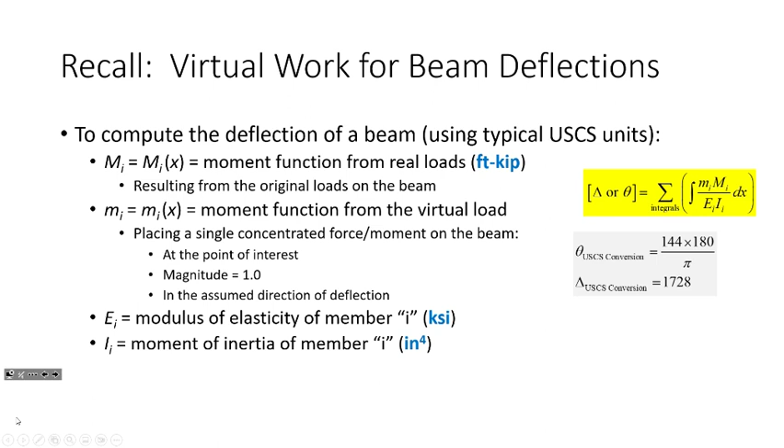Now, if you look at this from a units perspective, it doesn't align. We have foot-kips, but then we have KSI and inches to the fourth. So we have to use some conversion factors, and I derived these in the lecture video I pre-recorded. For deflections, the conversion factor is 1728, and for rotations it's 144. But since I like my rotations in degrees instead of radians, I take the 144 and multiply by 180 over pi to get the resulting value in degrees, not radians. Okay, let's see.

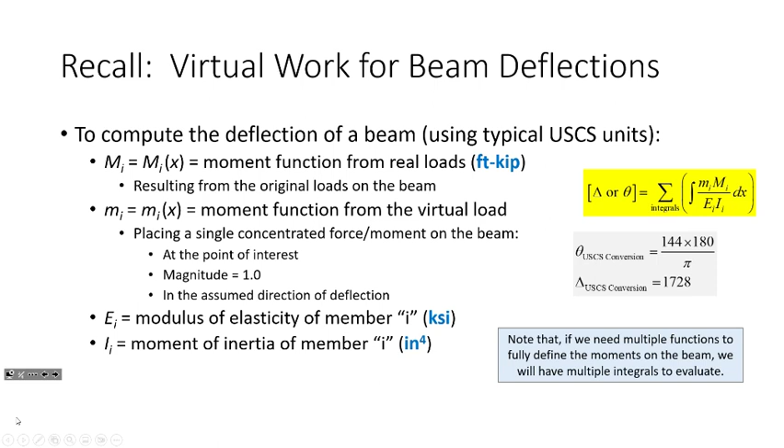We're not going to have this problem now, but we will start dealing with it Wednesday: if we need multiple functions to fully define the moments on the beam, we'll need multiple integrals to evaluate. This is a skill I'm really interested in harvesting over the next few lectures, so I want to talk about the need for multiple moment functions.

In short, you need multiple functions whenever you have a load interruption on the beam—like a reaction, a distributed load that commences or terminates, or a concentrated force effect that shows up. An easy way to figure this out is to move your section cut along the beam. Once you pass through a new type of load or load interruption, you need a new moment function.

For example, if I look at this beam, it has a reaction here and a reaction here, with a triangular distributed load. If I ask how many moment functions you'd need to fully define the moment diagram, an easy way is to take a vertical line and start moving it along the beam.

If I cut a section here and look this way, I see a triangular load. If I move it here, still a triangular load—from here all the way to here, it stays the same. But once I pass that point, it's different: now I've got the triangular load, plus this reaction and this distributed load. I keep going—distributed load, reaction, triangular load. It's not until I get to right here that it changes again: now there are two reactions. So this beam would need three mathematical functions to fully define the moment diagram.

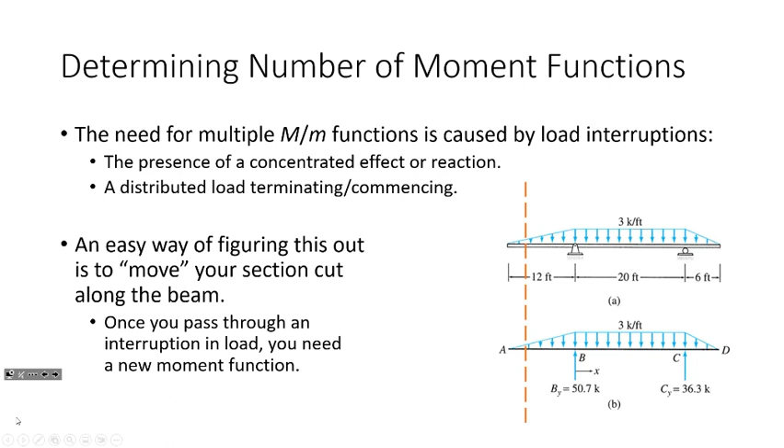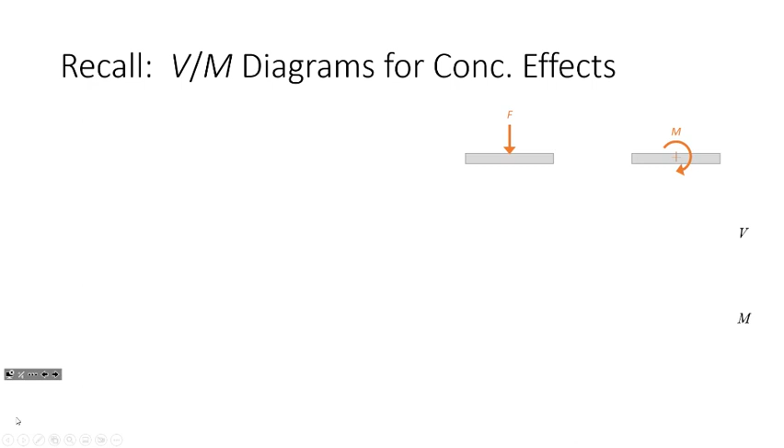Now, before we get into this, I want to recall what happens to the shear and moment diagrams for concentrated force effects. Why is this important? Because with virtual structures, you remove the entirety of the loads and replace them with either a concentrated force or a concentrated moment, at the point where you're interested in finding deflections in the assumed direction. So what does that look like? Let's take a look at the concentrated force effect.

You get these stair-stepped shear diagrams, and for moment diagrams, piecewise linear functions—that's what it looks like for concentrated forces. What about concentrated moments? It doesn't change the shear diagram, but the moment diagram gets a jump. So let's look at these moment diagrams—do you see any patterns? Every section of the moment diagram is a line—they're linear, right?

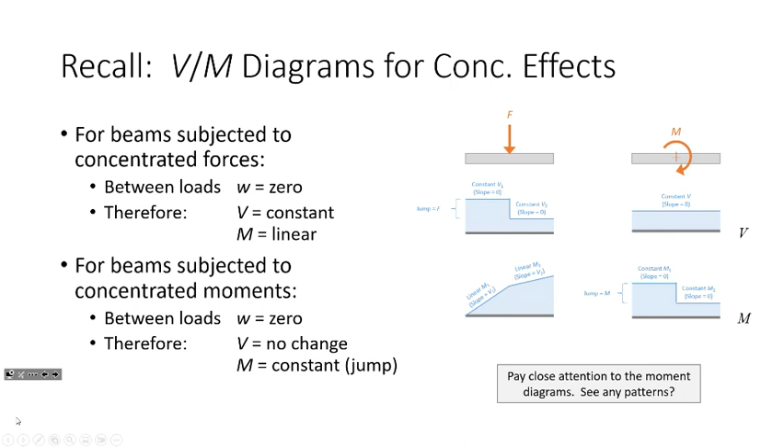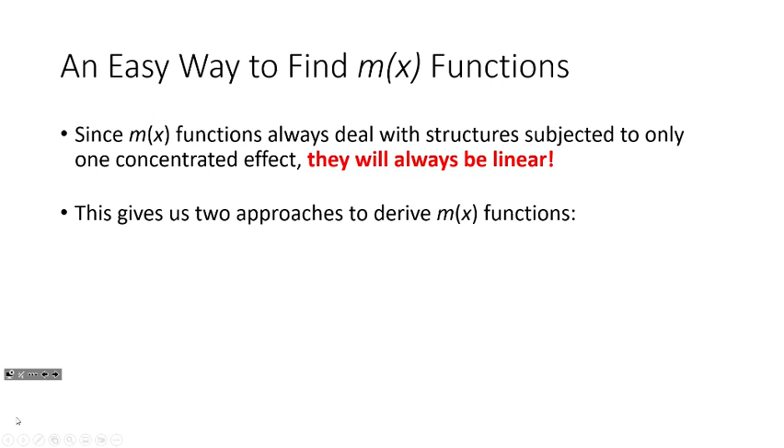What I am proposing is that for virtual structures, the moment diagrams will always be linear. They'll always be either piecewise linear functions or stair steps, every time. As a result, we can break out the lightsaber to derive moment functions, or we can go back to basic geometry.

Remember the equation of a line? We can get the slope, change in y over change in x, but do we even need to do that? Wasn't the slope of the moment diagram just the shear? Isn't the slope of the moment diagram equal to the shear diagram? Then y minus y1 equals m times x minus x1.

We can use that to find the equation for virtual structures a whole lot easier than cutting sections. But we can cut sections if we want. I just want you to know there's another tool available to find m of x functions, or little m functions, I should say.

So if we graphically construct the virtual shear and virtual moment diagrams, we can sort of look at them and quickly derive all of our little m functions. Makes our life a lot easier.

This observation also holds true for the real structure, but I don't use that as a general statement, because the real structure might have parabolic moment diagrams and all sorts of stuff going on, so it might be a little more challenging.

All right, any questions?

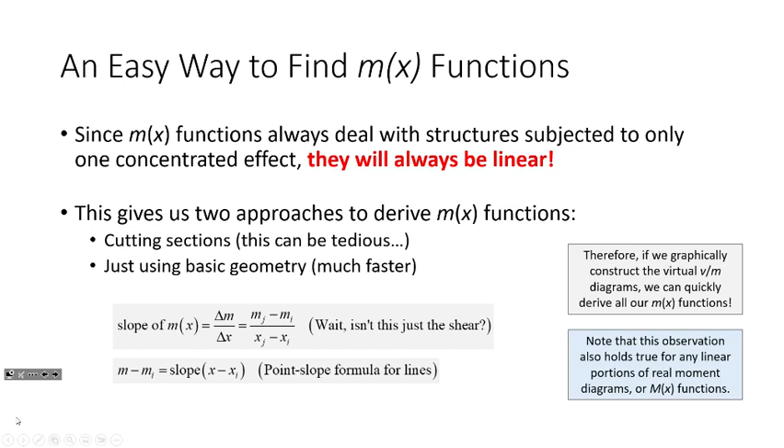This is going to be the star of the show for today. Let me open up the notebook. Give you all a second.

Jot this down. So we have a cantilever beam subjected to a uniformly distributed load of 2.5 kips per foot, and we're going to determine the vertical displacement and the rotation at point A using the method of virtual work.

Just to make sure it's crystal clear, I'm going to use these terms interchangeably: the term slope and rotation, and the term deflection and displacement.

One of the things I've conveniently located for you on this beam is a coordinate system.

Later on, in the real world, nobody's going to do that for you. You're going to have to do that yourself. And I have a lecture, which I ought to call Dr. Mike's Tips and Tricks, which is literally suggestions and advice for you to do this on your own. Are there ways to define these coordinate systems, and ways to simplify this to make your life a little easier?

I have some strategies that will result in less workload. To be clear, you can do it however you want, and as long as you're following the principles of algebra and statics, you're going to get the right answer. But there are ways to make your life easier.

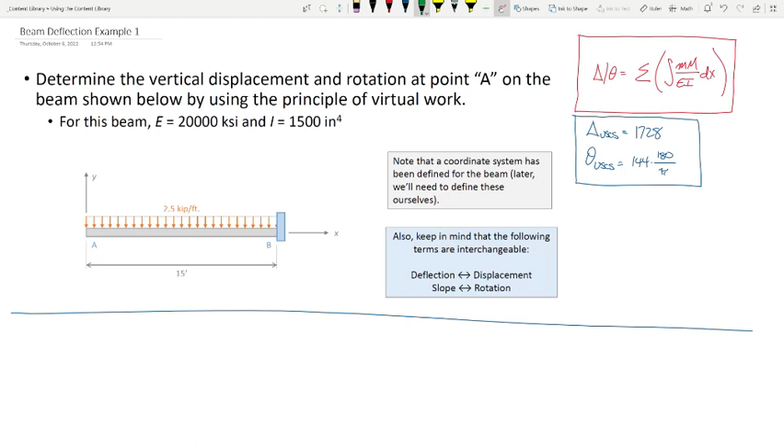Now let's make sure everybody was paying attention. How many moment functions am I going to need to fully define this moment diagram? Remember the strategy of cutting a section and looking. Just one, right? Again, the whole theme of today is problems involving single moment functions. So I'm going to cut a section.

Right? And then we're going to cut a section, we're going to look to the left. I think that's probably advantageous. If I cut a section and look to the right, I've got the reaction to deal with, and I don't need to deal with that if I look to the left.

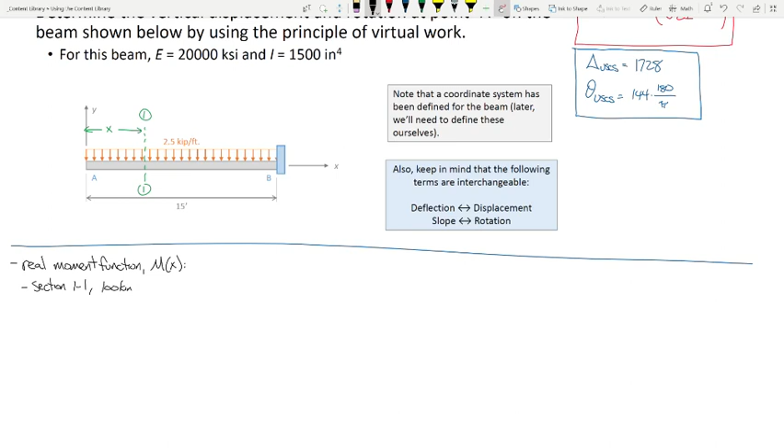So we'll call this real moment function. We'll call that M of x. Section 1-1, looking left.

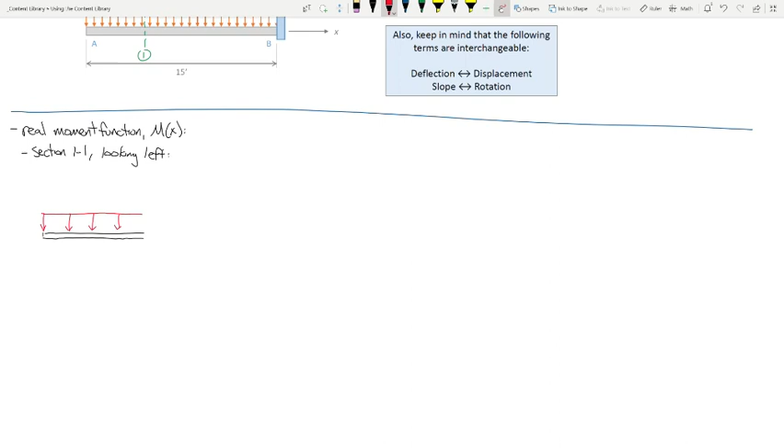Pop quiz. If I draw the shear in the positive direction, is that down or up? Down. Cutting a section looking left, downward shears are positive. Moments this way are positive. That is really important now. Making sure that you're drawing according to positive sign convention. If it kind of didn't matter before, now it really matters. This dimension here is x.

Let me move this down a little bit. All right, this is 2.5 kips per foot. So I'm going to collapse that into a single load. How much is that load? 2.5x. And this distance here is what? There you go, exactly right.

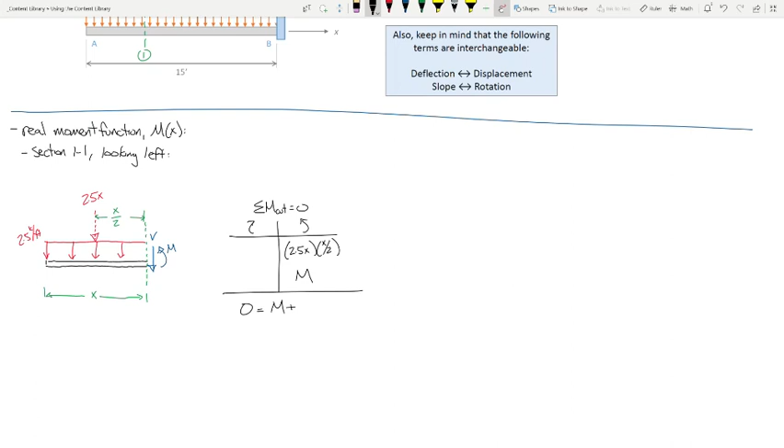So now, if I sum moments at the cut, I have 2.5 times x times a moment arm of x over 2. And then I have m also that way. I don't have any moments going the other way. So I have 0 equals m plus, and so what is that? What is 2.5x times x over 2? 1.25x squared. So therefore, m is negative 1.25x squared.

Now, I'm going to start introducing this notation. I'm going to say 1.25x squared, and I'm going to say 0 to 15. What that means is that this moment function is valid from x equals 0 to x equals 15. For this problem it doesn't really matter for spec'ing that out, simply because we know there's only going to be one moment function for the entire beam. But that's not the case for some later problems, and so it's actually kind of important to make sure that you have the moment function and where it's valid.

So just make sure you have that. Would it not be easier to just find the equation for your shear and then integrate that? You can do that, but remember, when you integrate, there's a constant of integration, so then you have to solve for that. And that constant of integration, for this problem, that value is 0, but not necessarily for some other problems. Does that work? Yeah, it works, but I'm not sure that it's more or less work. There's no specific reason you wouldn't do that other than it being subjectively easier.

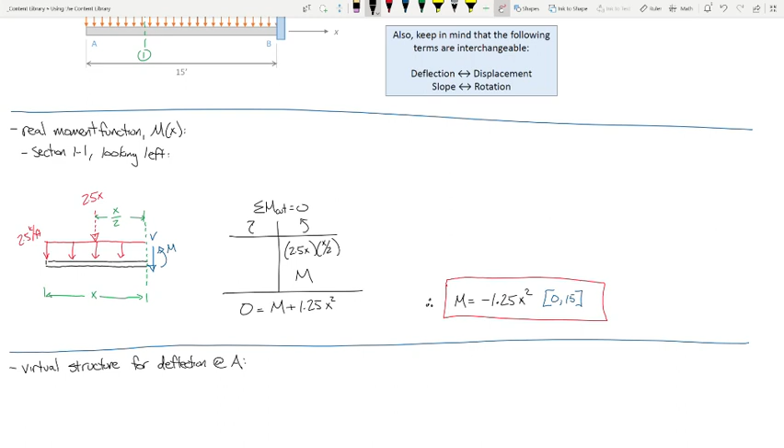And why am I saying the virtual structure for the deflection? Because there's two deflections we're going to have to compute in this problem. This problem is asking for the vertical displacement at A and the rotation at A, so we're going to need to do two separate deflection problems. That means we're going to have two little m's. It's the same real moments on the structure, like the big M function, I don't care what we're looking at, big M is negative 1.25x squared. But the little m functions are going to change depending upon what deflection we're looking for.

Now, we're looking for deflection at A, so that means we kick off all the loads originally on the structure and place a single unit load at A. Now my question is, do you think we should place that load upwards or downwards? Yeah, up? Well, let me ask you this. Take a look at this structure. Do you think point A is going to deflect upwards or downwards?

I guess it's going to deflect downwards. So if we put an upward load, we can work, but we'll get a negative answer for our deflection. I think point A is going to bend downwards. And if I take this beam and put all that load on it, it's going to deform downwards. So I'm going to take that point load and place it down. Does that make sense? You can place it up, you'll get the same moment.

I was thinking just to balance out. Maybe to leave... you shear positive, but... I understand what you're saying, but you place the load in the direction of your assumption of which way you think it's going to go.

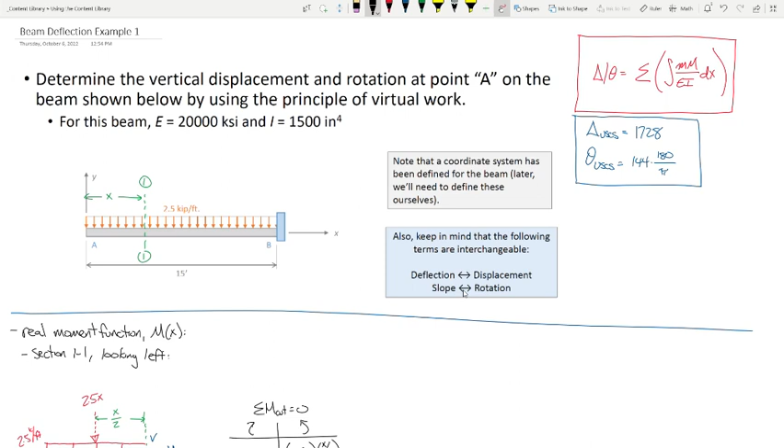Same with trusses. So my virtual structure is going to look like this. That's our virtual structure. We kick all the loads off and we put a single unit load at the point of interest in the direction of the assumed displacement.

So what am I going to do? I'm going to cut it out. How many moment functions are needed to fully define that moment diagram? It's just one, right? So I'm going to cut another section.

Some distance x away. Let's go through it. Here's the section cut. Again, same direction for shear, same direction for moment.

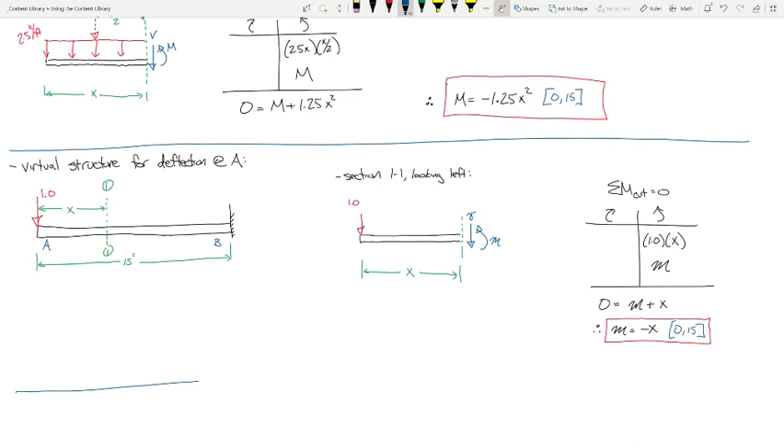That is the hard part. Everything else, this is the easy part. It's not hard, it's just rote. Okay, let me show you how this works.

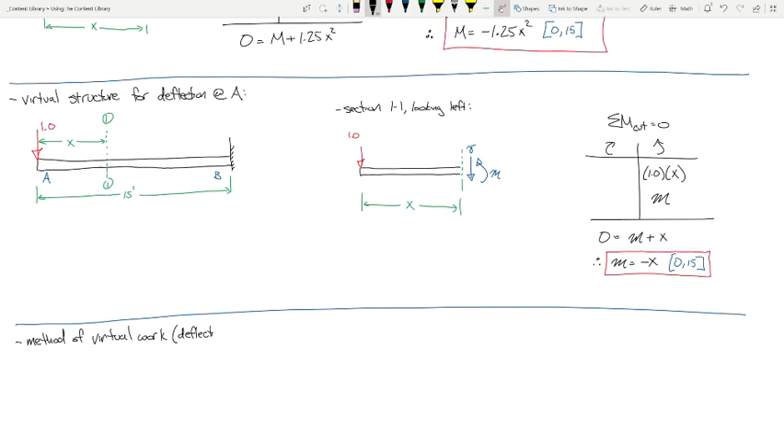So the method of virtual work for deflection at A. We have our little m, which is minus x, and our big M, which is minus 1.25 x squared. E and I were given at the beginning of the problem, 20,000 and 1,500, I believe they were.

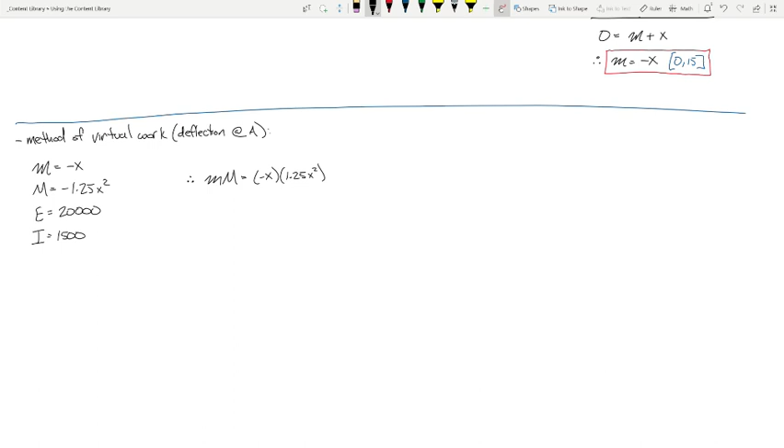Okay, here's what we're going to do. First thing we're going to do, we're going to handle our algebra first. Let's do little m times big M. So that's going to be negative x times negative 1.25 x squared, which is positive 1.25 x to the third.

And so therefore, our deflection at A is going to be the integral of little m, big M, over EI dx, which is going to be as follows. So we're going to integrate from x equals 0 to x equals 15 of what? Okay, let's see.

Let's start off with the bottom. We got 20,000. We've got 1,500. Little m, big M, we've already done that, is 1.25 x to the third dx. But hold on.

I'm missing something here. What am I missing? The conversion, a conversion factor. And what was the conversion factor for deflections? 1728. So I need to make sure that I'm not forgetting the 1728.

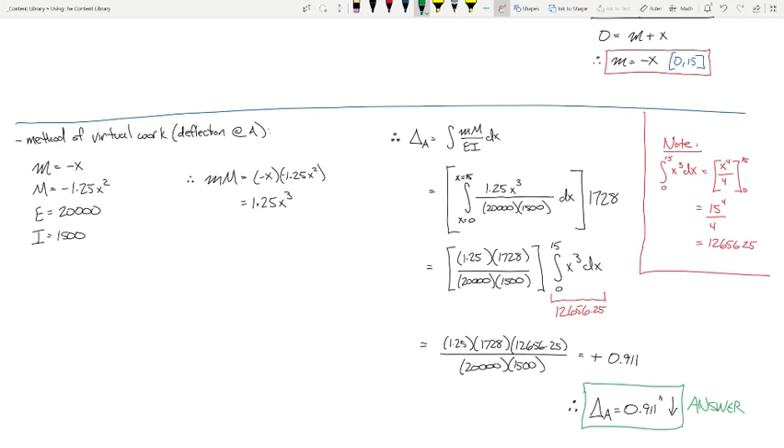Keep in mind this right here, let's put some units on this. Keep in mind, this is in foot kips. This is in KSI. This is in inches to the fourth. They're already in standard USCS units. By incorporating that factor, that converted our final answer to inches.

And remember, this is unitless.

All right, let me stop for a sec. Anybody have any questions?

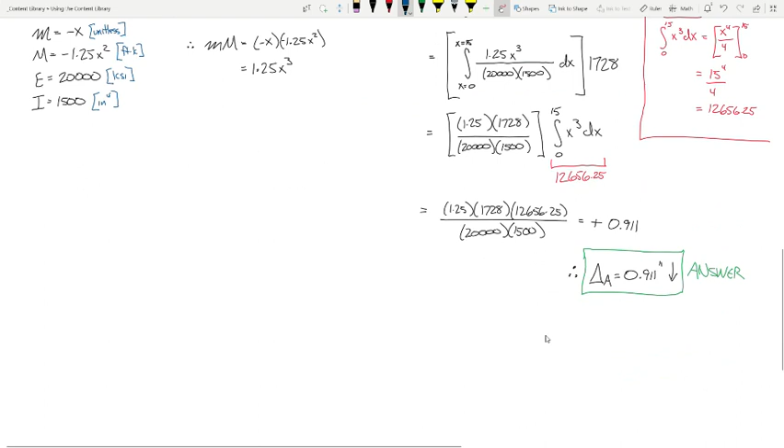Sound good? Okay, now if we want to determine rotation, we need another virtual structure.

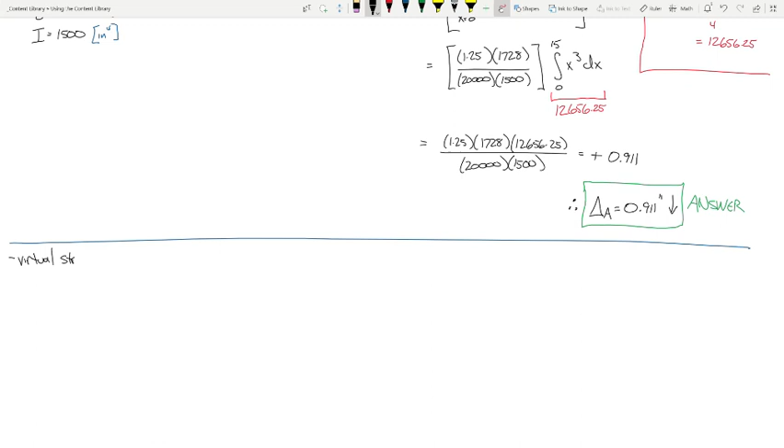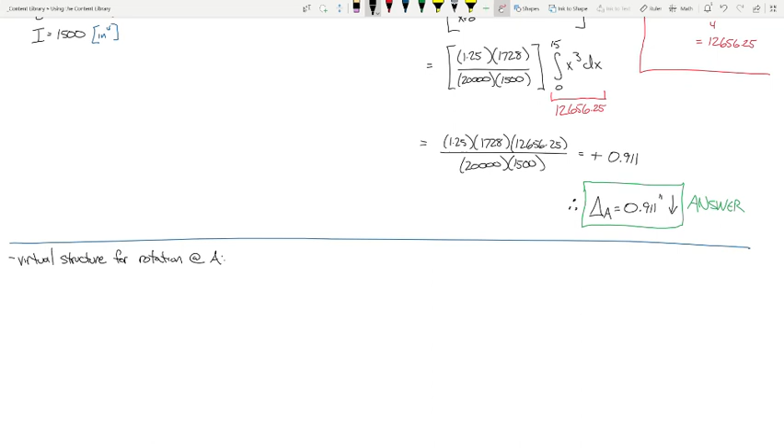So in order to handle virtual structure for rotation at A, what we do is we say, okay, here's the beam, and we place a single moment on the beam of 1.0.

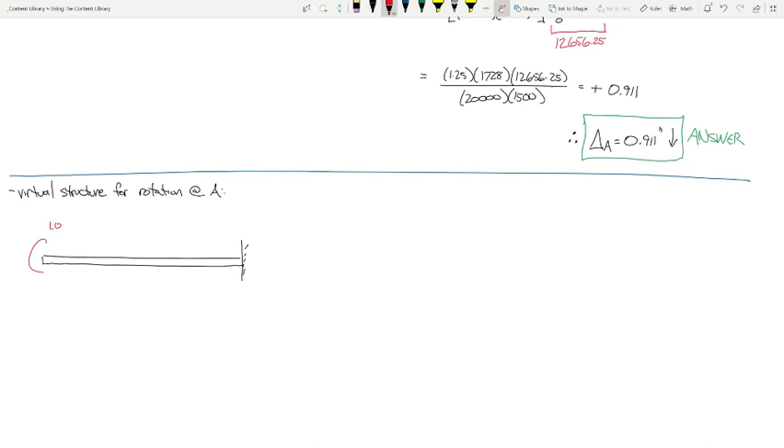Now, let me show you something. First off, this is 15 feet. Now, again, pick whatever direction that you want.

It doesn't matter. If you assume a direction and you get a positive answer, it means your assumption is correct. If you get a negative answer, it just means you flip your direction. But I'm going to place this moment going that way, okay?

And the reason being is, here's the beam, right? And the original loads were like this, right? This is what the beam looked like. I think that the deformation of the beam is probably going to look something like that, okay?

So that means that the slope here is like this, and the slope originally was like that. So here's what the slope was originally, here's what it becomes. It's got to rotate like that. Hence why I'm placing the moment like this, okay? That's why I'm placing the moment in that direction.

To be clear, I could place the moment this way, wouldn't matter. I'd just get a negative answer at the end.

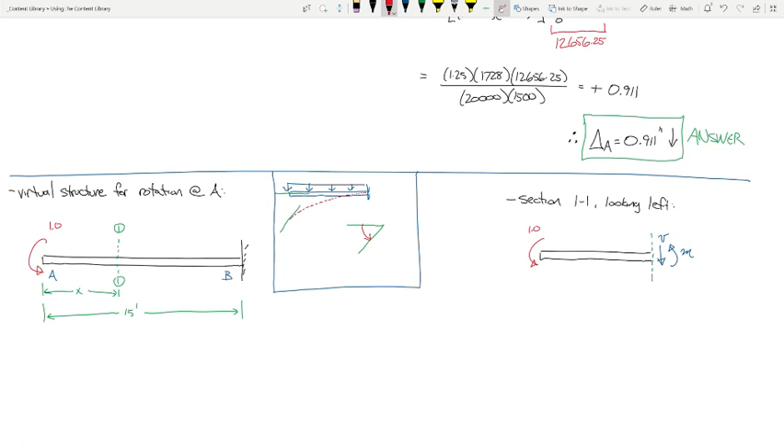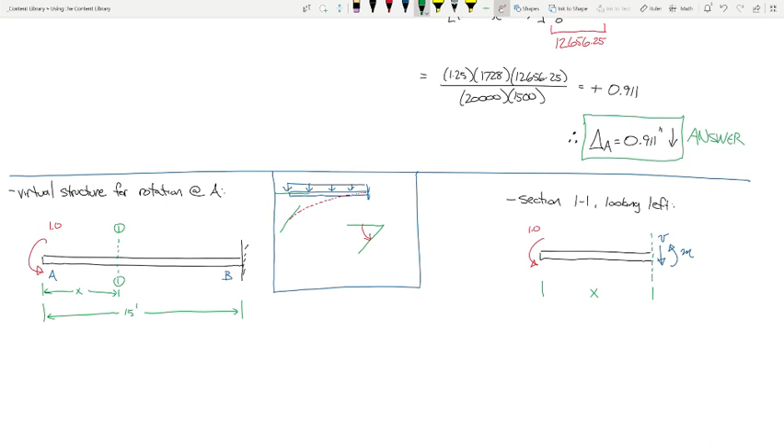This is x, and I just realized something. I have a typo here. This unitless, I said that m of x is unitless. That's actually not correct. This is in feet, and I'll talk about that here in a bit.

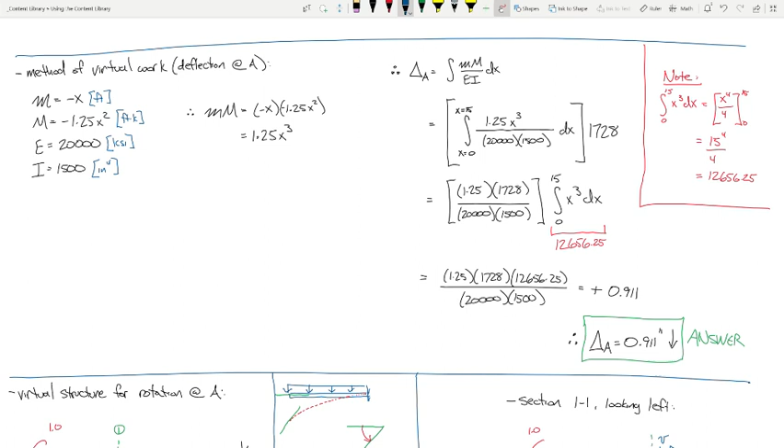So now what we're gonna do is we're gonna sum moments at the cut. Okay, so we have 1. Do we do 1 times x? No, it's a concentrated moment. You just add the moment. And then m, so 0 equals m plus 1.

Therefore, m is minus 1, from 0 to 15. So far, so good? So now we just do the same thing, method of virtual work.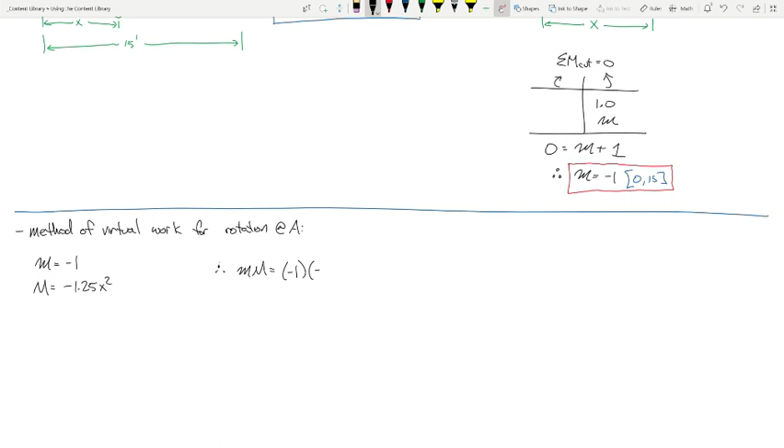So when, there you go, right? So little m, big M is going to be negative 1, negative 1.25 x squared, which is going to be positive 1.25.

Here's the analogy. When you do a truss analysis, if your real member is in compression and your virtual member is in compression, they're both negative. But then when you multiply them, you get positive. They're both experiencing negative bending. That means your assumption is correct.

And so E is 29,000, or not 29,000. I'm such a steel designer, you can tell it's my default.

Okay, so therefore, our rotation at A, using theta for angles, we have a similar setup, somewhat similar, just different guts going into it. So the integral of x equals 0 to x equals 15 of 1.25 x squared over 20,000 times 1500 dx, but now I have a conversion factor that I need to use. And what's the conversion factor? It's not 1728, it's 144 times 180 over pi, right?

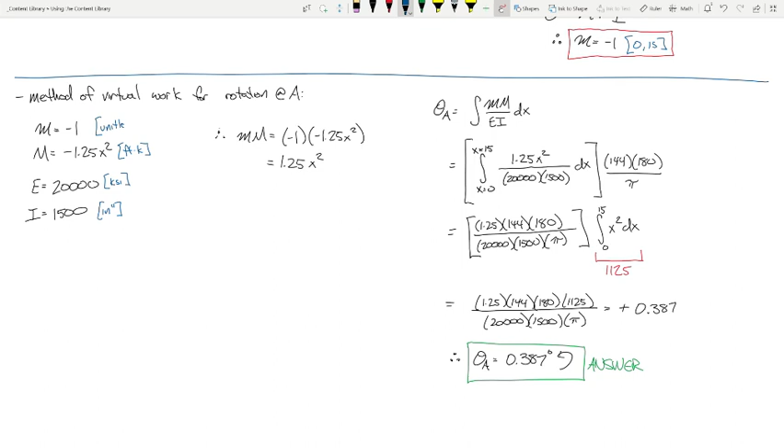And I'll talk about this units issue here in a second. So keep in mind, this is still inches to the fourth, this is still KSI, this is still foot kips, but this one is unitless. I had a typo earlier, I said that was unitless. Actually up here, it's in feet. See, that's why the previous calculation had 1728, where this one has 144, because there's an additional foot in there.

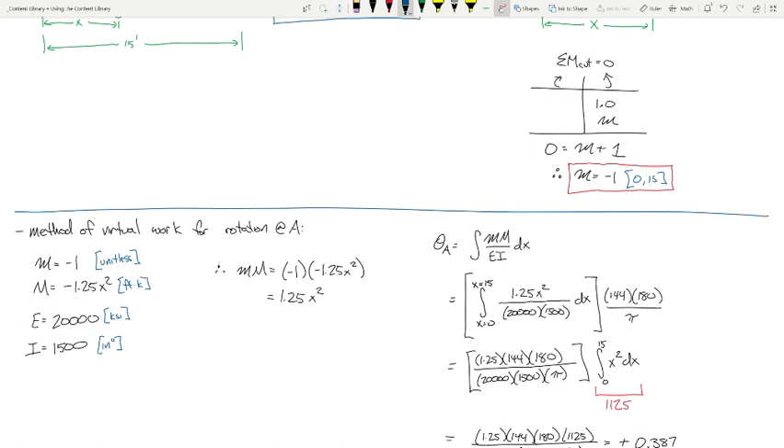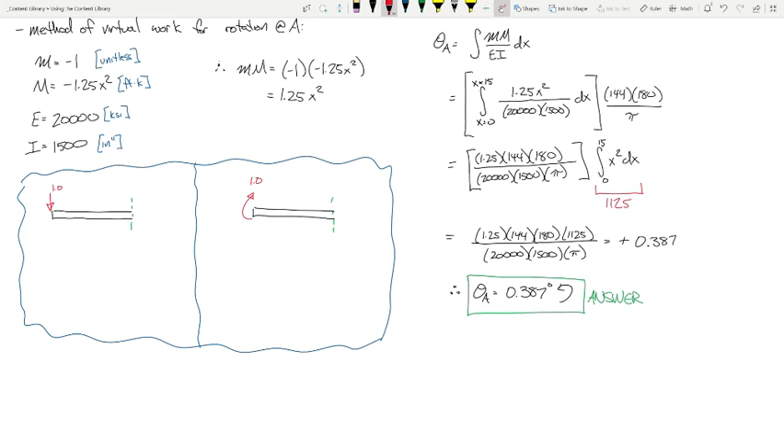And just to help drive the point, right? So if I have a section that I've cut, let's do the same section cut. Let's put a unit force here, and a unit moment here. And let's put a number. Let's say this is 63 feet. Let's say I cut the section here at 63 feet. That's V, that's M, that's V, that's M. What's the M here versus the M here?

Well, over here, the M is just going to be 1, right? Because you don't multiply by a distance. So it's just going to be 1, and it's going to be unitless. But over here, what's the moment? 63. 63 what? Force times the distance. The force doesn't have any units, but the distance sure does. 63 feet. So that's why up here, I had unitless there, but then feet there.

So I just wanted to make sure I explained that, because I did that and that was an error. I'm like, whoa, that's wrong. So I need to correct my error. That doesn't go on the mistake counter because I caught it. We forgive you. Thank you. I feel dedicated.

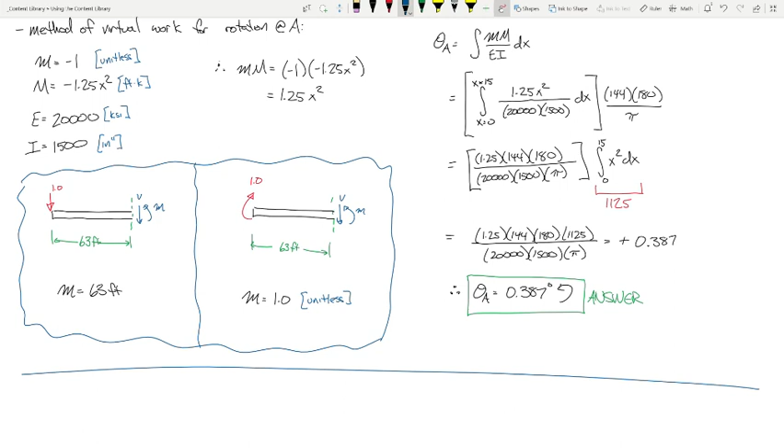So, any questions? That angle is with respect to the horizontal, I'm assuming, right? Yes, so like this. Like that. All right, I need to show you something with your homework, okay? But yes, you are right. So here's the beam and it deflects, that's how much that goes down.

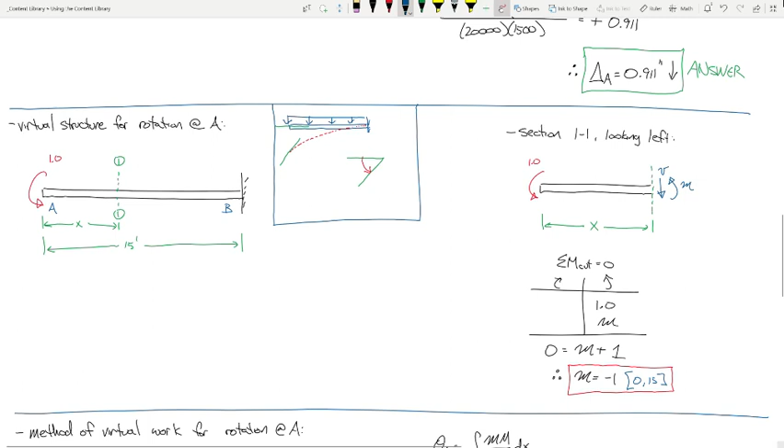Now, if you wanted to get real fancy, instead of placing your force or moment at the end, you can place it somewhere in the middle and find the deflection or rotation at any point. We'll talk about some ways to do that later. But I do want to show you something with your homework.